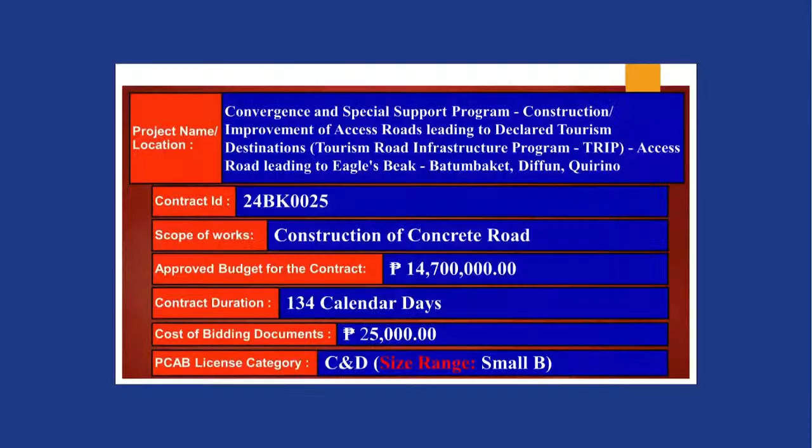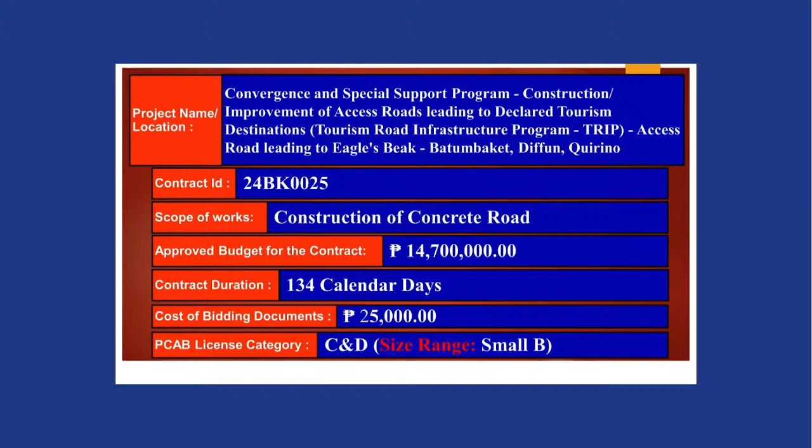For the first project, Convergence and Special Support Program, construction improvement of access roads leading to declared destinations, Tourism Road Infrastructure Program (TRIP), access road leading to Eagles Beak, Batumbaket, Diffun, Quirino. Contract ID 24BK0025. Scope of works: construction of concrete road. Approved budget for the contract: 14,700,000 pesos. Contract duration: 134 calendar days. Cost of bidding documents: 25,000 pesos. PCAB license category C&D, size range small B.

Second project is Sustainable Infrastructure Projects Alleviating Gaps (SIPAG), multipurpose buildings, facilities to support social services, construction of multipurpose building evacuation center at Dipintin, Delfin Albano, Quirino. Contract ID 23BK0147. Scope of works: construction of multipurpose building. Approved budget for the contract: 4,825,000 pesos. Contract duration: 134 calendar days. Cost of bidding documents: 5,000 pesos. PCAB license category C&D, size range small B.

Next project is Sustainable Infrastructure Projects Alleviating Gaps (SIPAG), multipurpose buildings, facilities to support social services, construction of multipurpose building evacuation center at Dumabato Norte, Maddela, Quirino. Contract ID 23BK0148. Scope of works: construction of multipurpose building. Approved budget for the contract: 4,825,000 pesos. Contract duration: 138 calendar days. Cost of bidding documents: 5,000 pesos. PCAB license category C&D, size range small B.

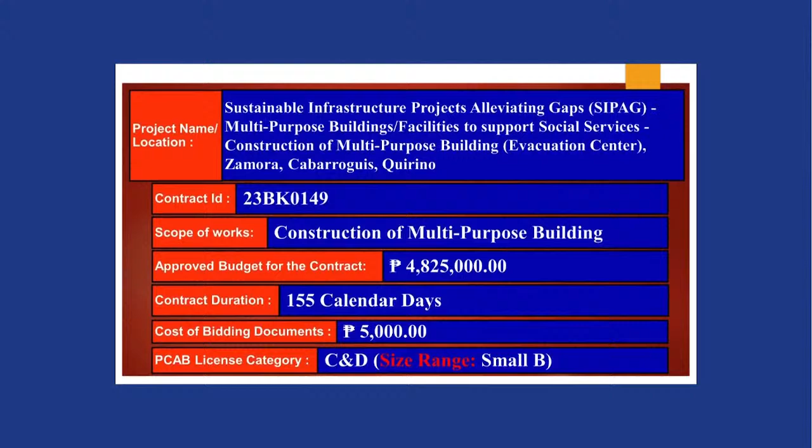Next project is Sustainable Infrastructure Projects Alleviating Gaps (SIPAG), multipurpose buildings, facilities to support social services, construction of multipurpose building evacuation center at Zamora, Cabarroguis, Quirino. Contract ID 23BK0149. Scope of works: construction of multipurpose building. Approved budget for the contract: 4,825,000 pesos. Contract duration: 155 calendar days. Cost of bidding documents: 5,000 pesos. PCAB license category C&D, size range small B.

Last project is Sustainable Infrastructure Projects Alleviating Gaps (SIPAG), multipurpose buildings, facilities to support social services, construction of multipurpose building at Mataddi, Nagtipunan, Quirino. Contract ID 23BK0150. Scope of works: construction of multipurpose building. Approved budget for the contract: 4,825,000 pesos. Contract duration: 138 calendar days. Cost of bidding documents: 5,000 pesos. PCAB license category C&D, size range small B.

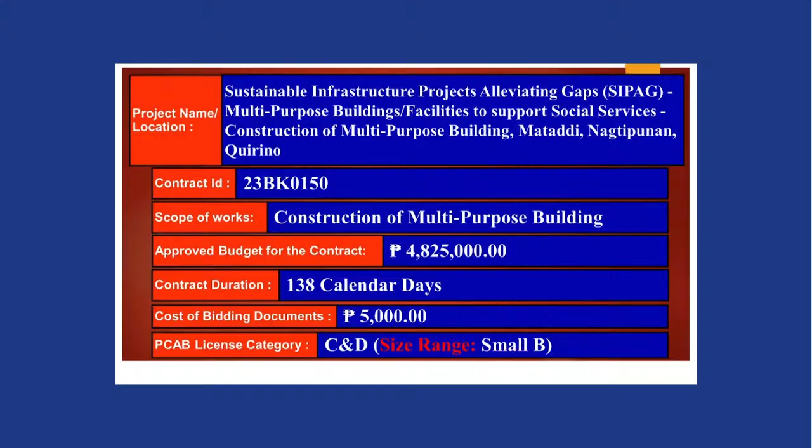This pre-bid conference is to discuss, clarify, and explain, among other things, the eligibility requirements and the technical and financial component of the contract to be bid, including questions and clarifications raised by the prospective bidders before and during the pre-bid conference.

It is conducted not earlier than 7 calendar days from the posting of invitation to bid and at least 12 calendar days before the deadline of submission of bids.

A supplemental or bid bulletin is issued to answer questions or requests for clarifications or interpretation, and upon BAC's initiative to clarify or modify any provisions of the bidding documents. It is posted in the PhilGEPS and DPWH websites and at our bulletin board at least 7 calendar days before the deadline of bid submission. It is the duty of the prospective bidders to always check the websites for any issued bulletins.

In the receipt and opening of bids, bids submitted should be on the date, time, and either at its physical address or through online submission specified in the advertisement through a single-stage two-envelope system. Bid should be valid for a period not exceeding 120 calendar days from the date of the opening of bids.

The first envelope must contain the eligibility requirements and the technical component, and the second envelope must contain the financial component. In the sealing and marking of bids,

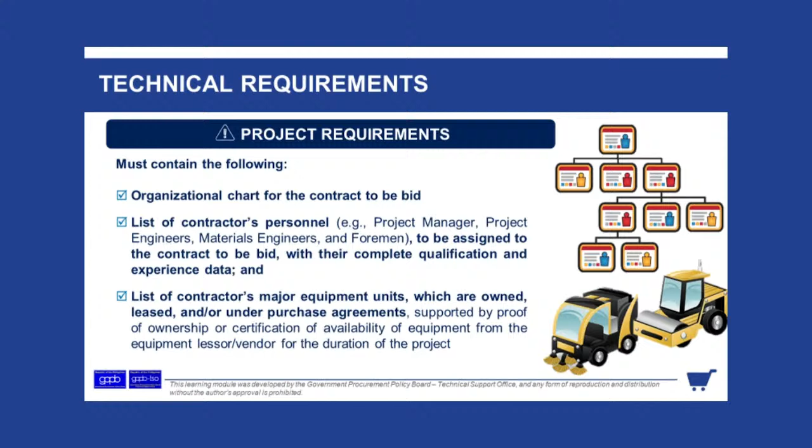For the project requirements, it must contain the following: the organizational chart for the contract to be bid, the list of contractors' personnel, such as the project manager, project engineer, materials engineer, and the foreman, to be assigned to the contract to be bid with their complete qualification and experience data, and the list of contractors' major equipment units which are owned, leased, and or under purchase agreement, supported by proof of ownership or certification of availability of equipment from the equipment lessor or vendor for the duration of the project.

For the revised Omnibus Sworn Statement form, Statement number 3 was revised and Statement number 10 was added, which states that in case advance payment was made or given, failure to perform or deliver any of the obligations and undertakings in the contract shall be sufficient ground to constitute criminal liability for swindling or the commission of fraud with unfaithfulness or abuse of confidence through misappropriating or converting any payment received by a person or entity under an obligation involving the duty to deliver certain goods or services to the prejudice of the public and the government of the Philippines, pursuant to Article 315 of Act Number 3815, Series of 1930, as amended, or the Revised Penal Code.

For the contents of the second envelope, first is the financial bid form, including bid prices and bill of quantities, as well as applicable price schedules and other documents required in the bidding documents.

In the detailed evaluation of bids, its purpose is to determine the lowest calculated bid by establishing correct calculated prices of bids and ranking calculated total bid prices from lowest to highest. A non-discretionary criterion shall be used, which shall include consideration of completeness of bids and minor arithmetical corrections. Results shall be contained in the abstract of bids as calculated.

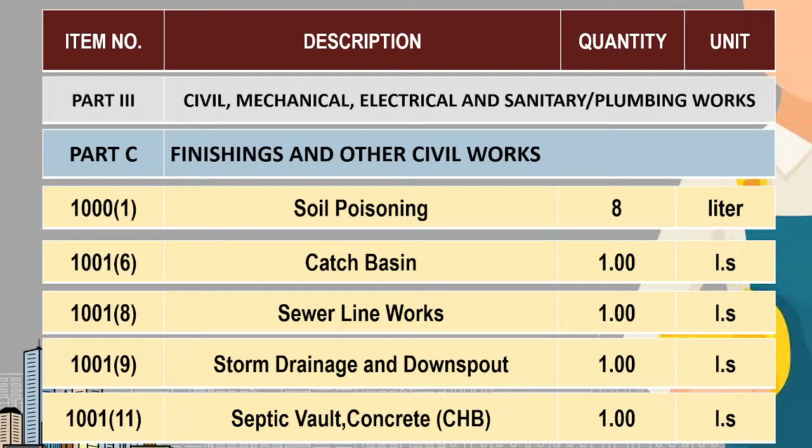Septic Vault, CHB, 1 lump sum. Plumbing and Fixtures, 1 lump sum. Cold Water Line, 1 lump sum.

Ceiling, Metal Frame Fiber Cement Board, 358.63 square meters. Finishing Hardware, 1 lump sum.

Residential Casement Steel, 21.24 square meters. Flush Door, 10.50 square meters. Frame Jambs, Seals, Head Transoms, and Mullions, 13 sets. Doors, Wood Panel, 15.60 square meters.

Fabricated Metal Roofing Accessory, Ridge Hip Rolls, 15.60 linear meters. Flashing, 48.70 linear meters. Gutters, 32 linear meter. Prepainted metal sheets, rib types, long span, 686.70 square meters. Glazed tiles and trims, 62.28 square meters.

Unglazed tiles, 317.20 square meters. Cement plaster finish, 643.90 square meters. Painting works steel, 322.80 square meters. Reflective insulation, 174.14 square meters.

CHB non-load bearing, 100 mm, 126.43 square meters. 150 mm CHB, 81.84 square meters. Structural steel trusses, 1,112.96 kilograms. Purlins, 2,137.98 kilograms. Sagrods, 56.16 kilograms.

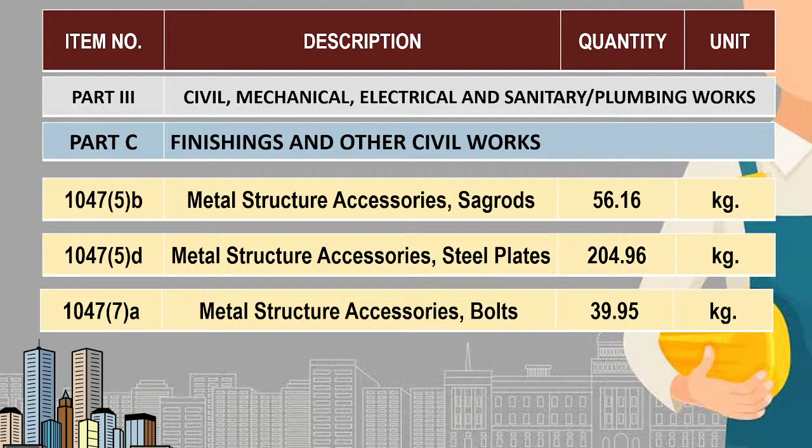Steel plates, 204.96 kilograms. Bolts, 39.95 kilograms. Electrical, conduits, boxes, and fittings, 1 lump sum.

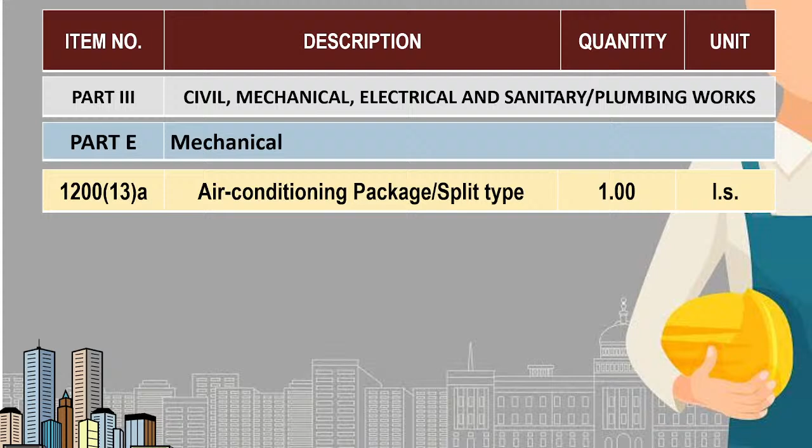Wires and wiring devices, 1 lump sum. Panel board with main and branch breakers, 1 lump sum. Lighting fixtures and lamps, 1 lump sum. Air conditioning package split type, 1 lump sum.

Thank you, Architect. Are there any queries, clarifications, or concerns regarding the project presented? Hearing none, let's proceed with the next.

BK 0148, Sustainable Infrastructure Projects, Alleviating Gaps, SIPAG Multipurpose Buildings, Facilities to Support Social Services. Construction of Multipurpose Building, Dumabato Norte, Maddela, Quirino.

Calendar day, dimension. 16 by 10 meters. Calendar days, 155 days. Part 1, Provision of progress photographs, 5.17 months.

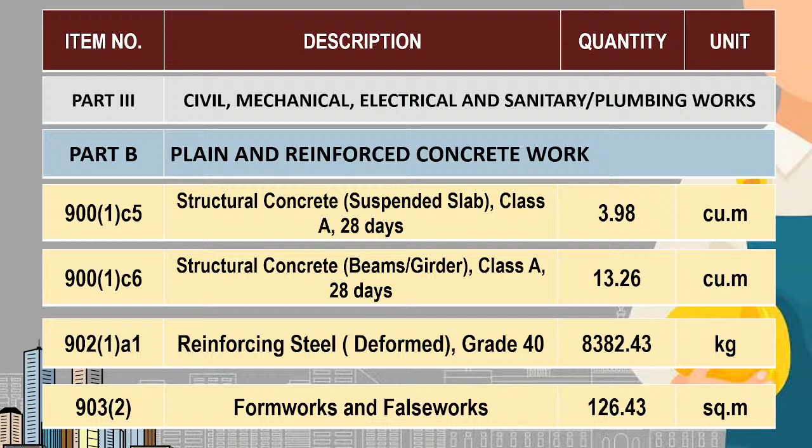Beams and girders, 13.26 cubic meters. Reinforcing steel, deform, grade 40, 8,382.43 kilograms. Formworks and false works, 126.43 square meters. Soil poisoning, 8 liters.

Sewer line works, 1 lump sum. Plumbing fixtures, 1 lump sum. Cold water lines, 1 lump sum.

Ceiling, 4.5 metal frame, fiber cement board, 281.73 square meters. Residential casement steel, 20.66 square meters. Frame jamb sills, head, transoms, and mullions, 12 sets.

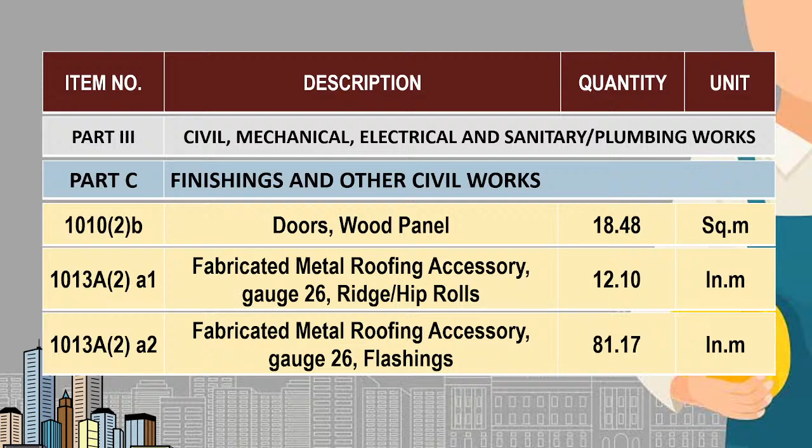Doors, flush, 3.36 square meters. Doors, wood panel, 18.48 square meters. Fabricated metal roofing accessories, ridge hip rolls, 12.10 linear meter. Flashing, 81.17 linear meters. Prepainted metal sheets, rib type, long span,

222.96 square meters. Floor finishes, 1 lump sum. Cement plaster finish, 661.14 square meters. Masonry, painting works masonry,

929.20 square meters. Painting works steel, 507.45 square meters. Reflective insulation, 197.88 square meters. CHB non-load bearing, 100 mm, 36.17 square meters.

CHB non-load bearing, 150 mm, 289.98 square meters. Structural steel, 1 lump sum. Structural steel trusses, 2,671.34 kilograms. Purlins, 3,184.62 kilograms. Metal structure accessories, turnbuckle 12 each, cross bracing 118.62 kilograms, steel plates

470.47 kilograms, bolts 55.30 kilograms, sagrods 39.34 kilograms.

Electrical conduits, boxes, and fittings 1 lump sum, wires and wiring devices 1 lump sum, panel board with main and branch breakers 1 lump sum, lighting fixtures and lamps 1 lump sum.

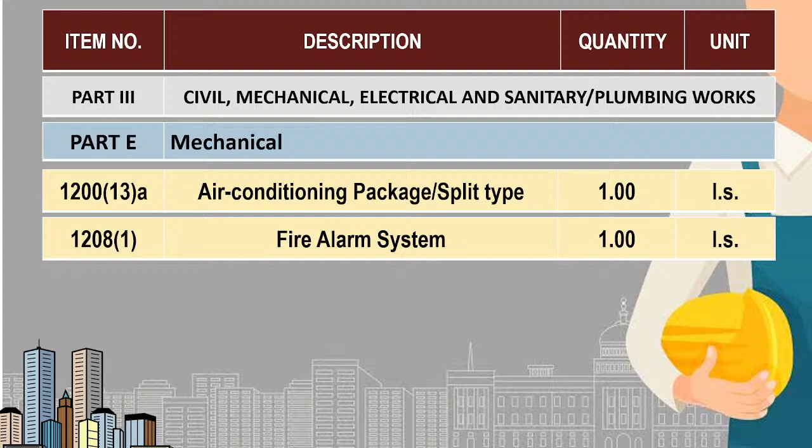Air conditioning package, split type 1 lump sum, fire alarm system 1 lump sum.

Thank you. Are there any queries, clarifications, or concerns with regards to the presented project? Hearing none, let's proceed with the next project.

For 23BK-0149, Sustainable Infrastructure Projects Alleviating Gaps, SIPAG, Multipurpose Buildings, Facilities to Support Social Services, Completion of Multipurpose Building Evacuation Center, Zamora, Cabarroguis, Quirino.

Total project duration, 155 calendar days. Part 1, provision of progress photographs, 5.17 months. Part 2, permits and clearances, 1 lump sum. Project billboard, signboard, 2 each. Occupational safety and health program, 1 lump sum. Mobilization, demobilization, 1 lump sum.

Part A, structure excavation, common soil, 75.03 cubic meter. Embankment, structure excavation, 60.02 cubic meter. Embankment from borrow, 3.81 cubic meter. Gravel fill, 11.51 cubic meter.

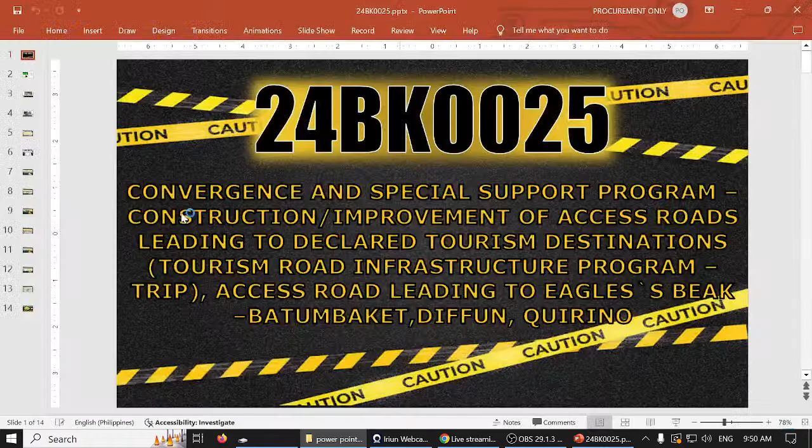Part B, structural concrete, Class A, 3.20 cubic meter. Structural concrete slab, footings and slab on fill, 18.38 cubic meter. Footing tie beams, 3.51 cubic meter. Columns, 9.74 cubic meter. Suspended slab, 13.38 cubic meter. Beams, girders, 14.10 cubic meter.

Reinforcing steel, grade 40, 7,925.52 kilograms. Formworks and false works, 155.43 square meters. Part C, soil poisoning, 5 liters.

Sewer line works, 1 lump sum. Septic vault, concrete, CHB, 1 lump sum. Plumbing fixtures, 1 lump sum. Cold water lines, 1 lump sum.

Ceiling, 4.5 metal frame, fiber cement board, 348.65 square meters. Aluminum glass windows, sliding type, 47.52 square meters. Awning type, 4.96 square meters. Frames, jamb sills, head transoms and mullions, 18 sets.

Doors, flush, 10.08 square meters. Doors, wood panel, 24.36 square meters. Fabricated metal roofing accessories, flashing, 63.60 linear meters. Metal painted roofing sheet, rib type, long span, 223.40 square meters.

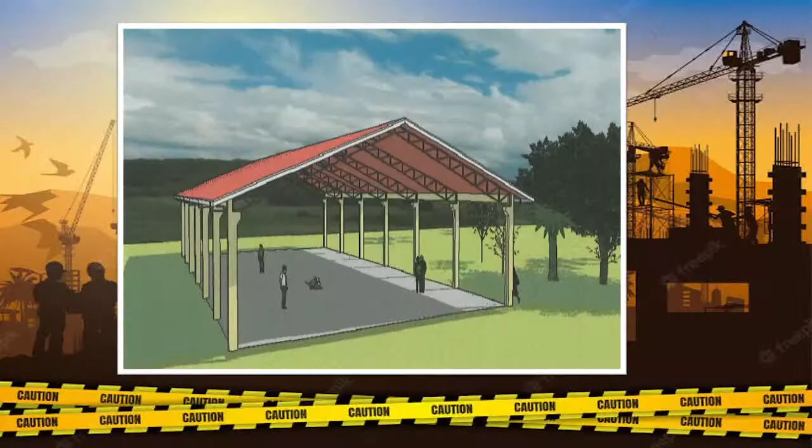For 23BK0150, Sustainable Infrastructure Projects, Alleviating Gaps, SIPAG Multipurpose Buildings, Facilities to Support Social Services, Construction of Multipurpose Building, Matadi, Nagtipunan, Quirino. Dimension, 10 by 15 meters. Duration, 138 calendar days.

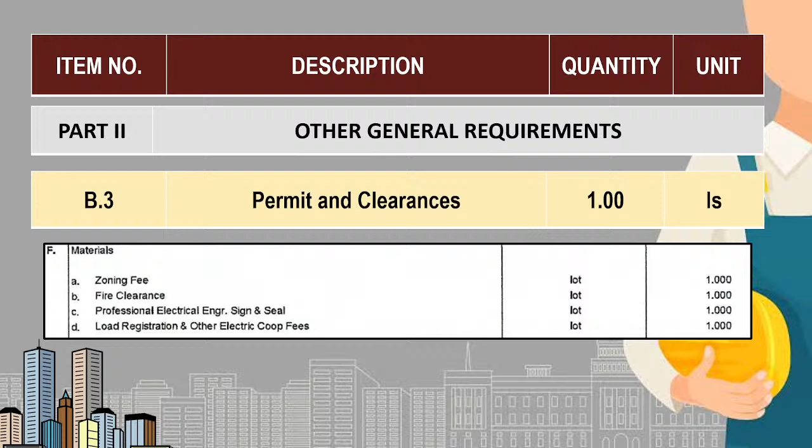Part 1, Provision of Progress Photographs, 4.60 months. Permits and clearances, 1 lump sum. Project billboard, signboard, 2 each. Occupational Safety and Health Program, 1 lump sum. Mobilization, demobilization, 1 lump sum.

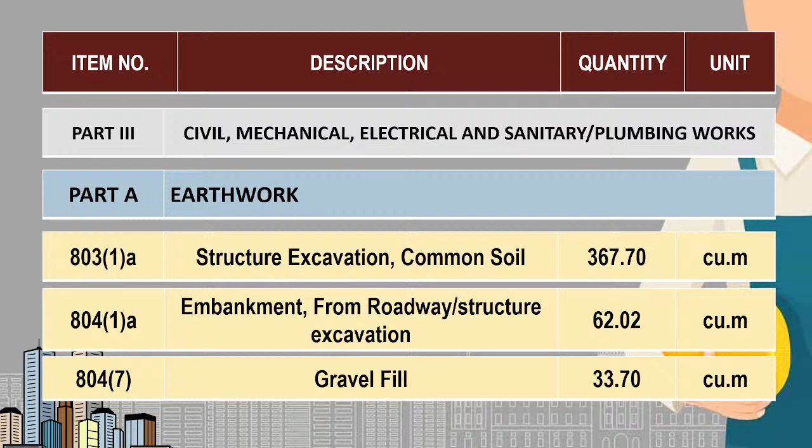Part 3, Structure Excavation, Common Soil, 367.70 cubic meter. Embankment, Structure Excavation, 62.02 cubic meter. Gravel Fill, 33.70 cubic meter.

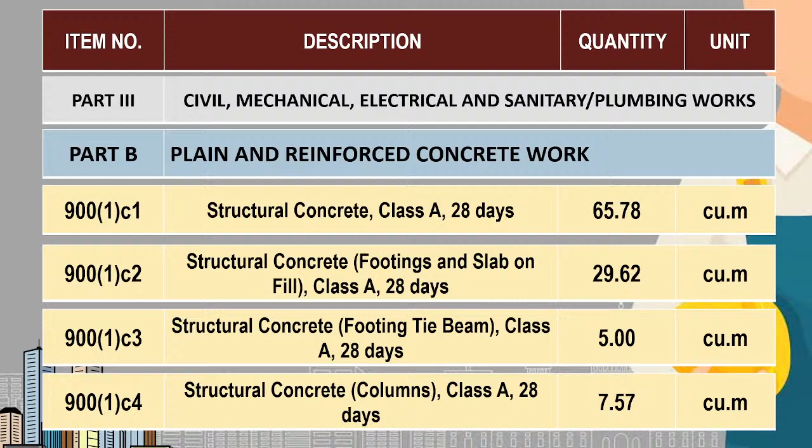Structural Concrete, 65.78 cubic meter. Footings and slab on fill, 29.62 cubic meter. Footing tie beams, 5 cubic meter. Columns, 7.57 cubic meter. Beams, girders, 9.51 cubic meter.

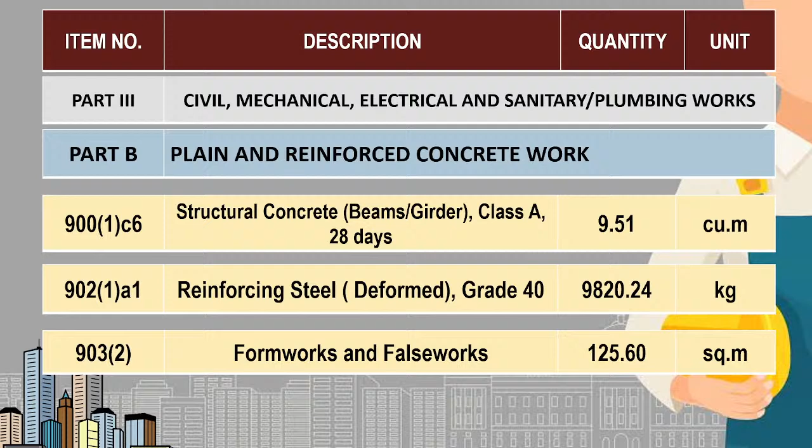Reinforcing steel, deform, grade 40, 9,820.24 kilograms. Formworks and false works, 125.60 square meters. Soil poisoning, 9 liters. Sewer line works, 1 lump sum.

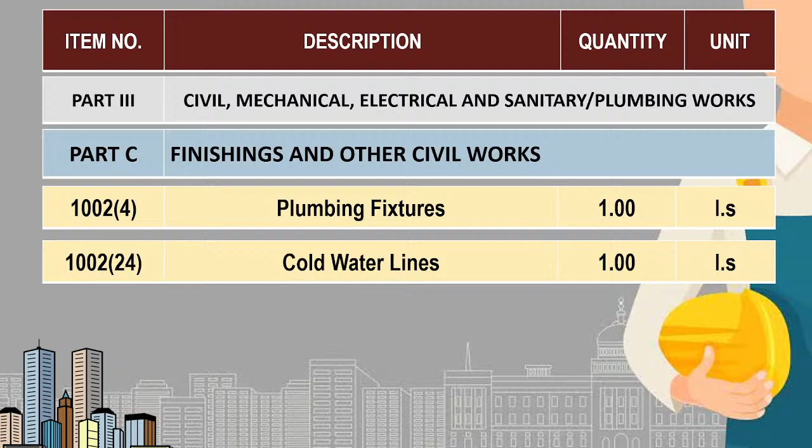Septic vault, CHB, 1 lump sum. Plumbing fixtures, 1 lump sum. Cold water lines, 1 lump sum. Ceiling, 4.5 mm metal frame fiber cement board, 25.60 square meters.

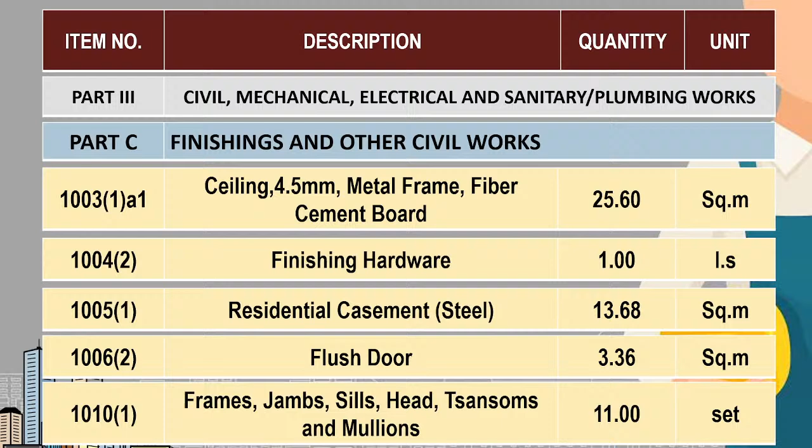Finishing hardware, 1 lump sum. Residential casement steel, 13.68 square meters. Flush door, 3.36 square meters. Frames, jambs, sills, head, transoms and mullions, 11 sets. Doors, wood panel, 3.57 square meters.

Roll-up doors, 1 lump sum. Fabricated metal roofing accessory, ridge hip rolls, 17 linear meters. Flashings, 26 linear meters. Prepainted metal sheets, rib type, long span, 221 square meters. Glaze tiles and trims, 22.24 square meters.

And glaze tiles, 15 square meters. Cement plaster finish, 218.19 square meters. Painting works, masonry, concrete, 244.69 square meters. Steel,

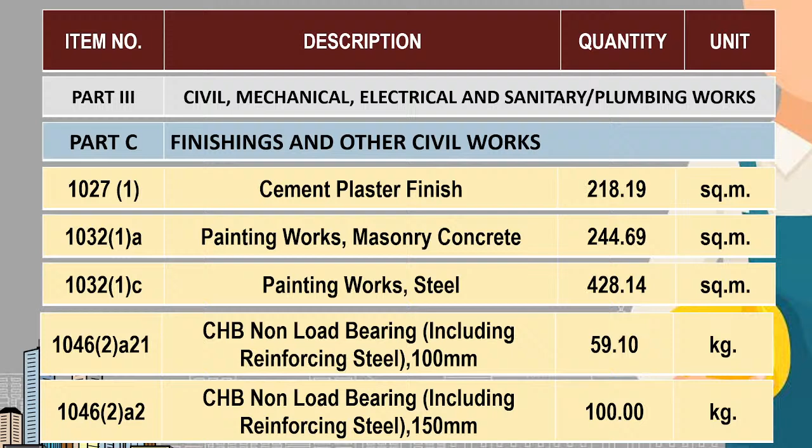428.14 square meters. CHB non-load bearing, 100 mm, 59.10 kilograms. 150 mm CHB, 100 kilograms, square meters. Structural steel trusses,

1,391.25 kilograms. Purlins, 2,842.44 kilograms. Metal structure accessories, turnbuckle, 12 kilograms. Sagrods, 69.27 kilograms. Cross bracing,

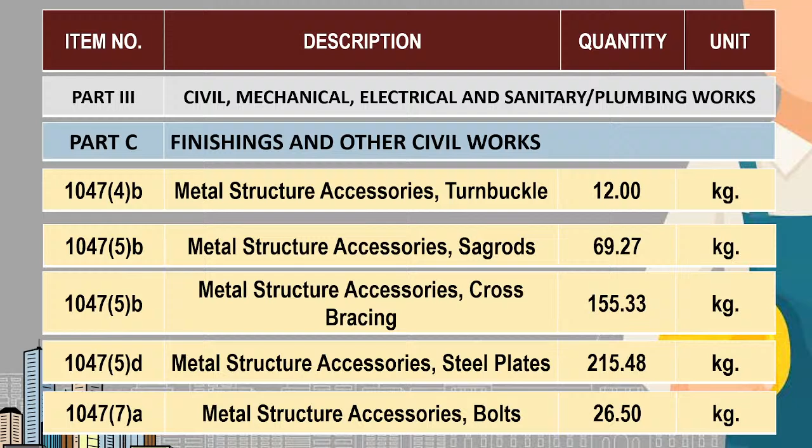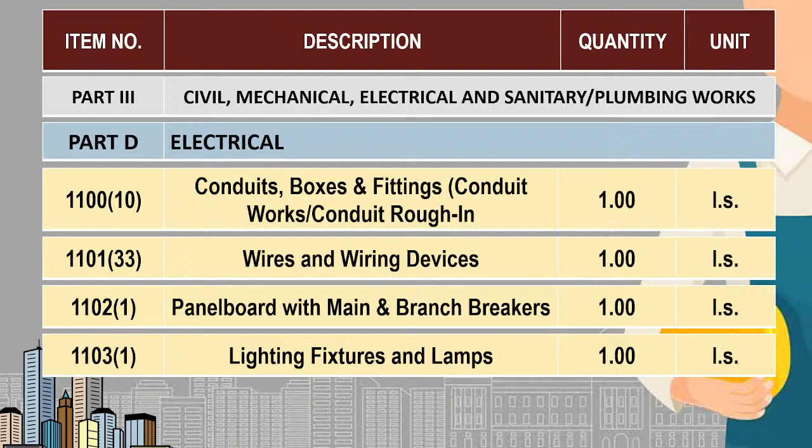155.33 kilograms. Steel plates, 215.48 kilograms. Bolts, 26.50 kilograms. Electrical conduits, boxes, and fittings, 1 lump sum. Wires and wiring devices, 1 lump sum. Panel board with main and branch breakers, 1 lump sum. Lighting fixtures and lamps, 1 lump sum.

Thank you, Architect Eva Grospe. Are there any queries, clarifications, or concerns with regards to the presented project? Hearing none. Any announcement from the BAC secretariat?